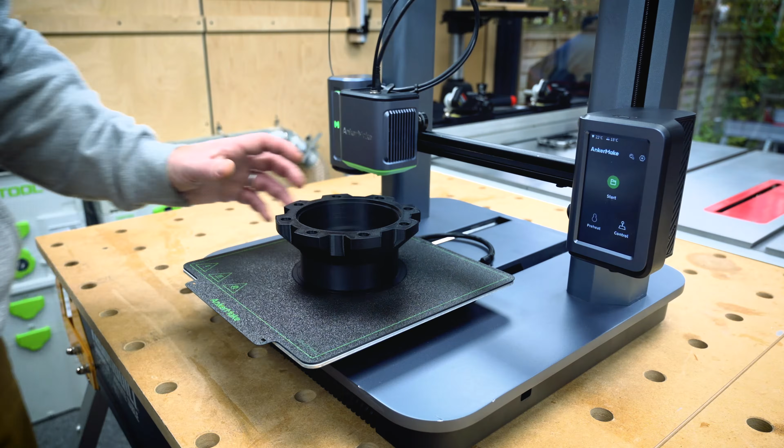I'm not a 3D printing expert. I'm a woodworker who's discovered that 3D printing for the workshop is super useful as well as being a lot of fun. I want to take you through the how, the what, and the why for bringing a 3D printer into the woodshop.

Before you click off, let me ask you, do any of these sound like you? Why would I try 3D printing? I work wood, not plastic. Isn't 3D printing just about creating toys and art that doesn't have any functional value? I don't have time to learn all the geeky aspects of another hobby. I've already got one of those.

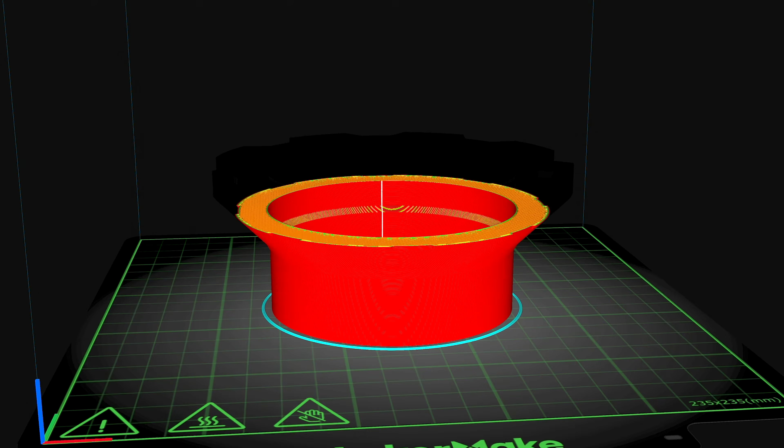If you'd asked me a year ago whether I wanted to try 3D printing, all of these would have been my answers. However, fast forward to now, and my views have totally changed. I have realized the value of having a 3D printer in the shop for making functional parts. I've also seen how modern printers take most of the tinkering away and pretty much let you get going straight away. So if you're curious about bringing a 3D printer into your shop but you aren't sure what you need to know or what sort of problems you can solve with printing, then this video is for you.

Now, a useful way to frame the topic of getting started in 3D printing is to ask, what do I need to make the parts? Let's sketch out the key pieces to get a sense of the full workflow. At the heart of the workflow, there is of course the printer. While there is huge choice here, for woodworkers, there are really only a few worth considering.

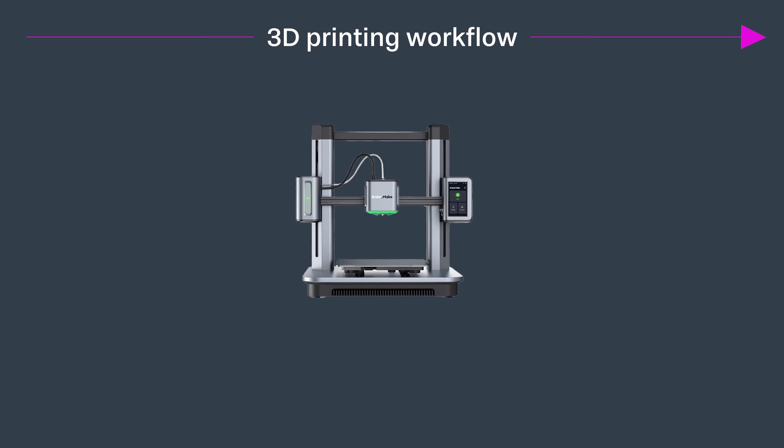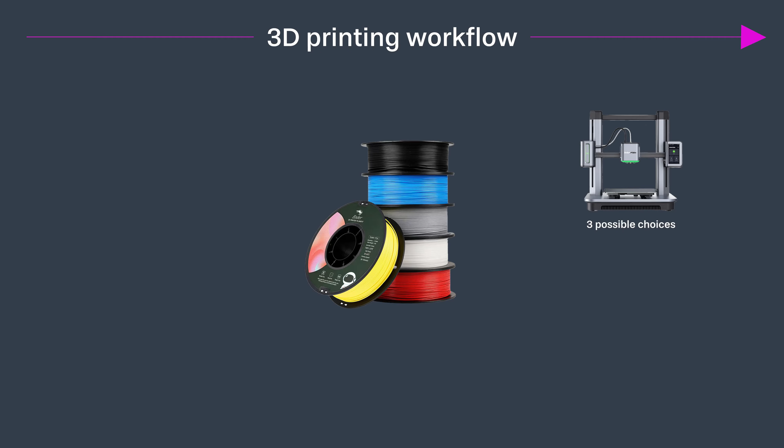Alongside your printer, the next most important part is the plastic consumable, or the filament that you use. Now, while there are loads of types of thermoplastic that you can use, and of course many brands, for the shop, we only really need to consider 3 to start with.

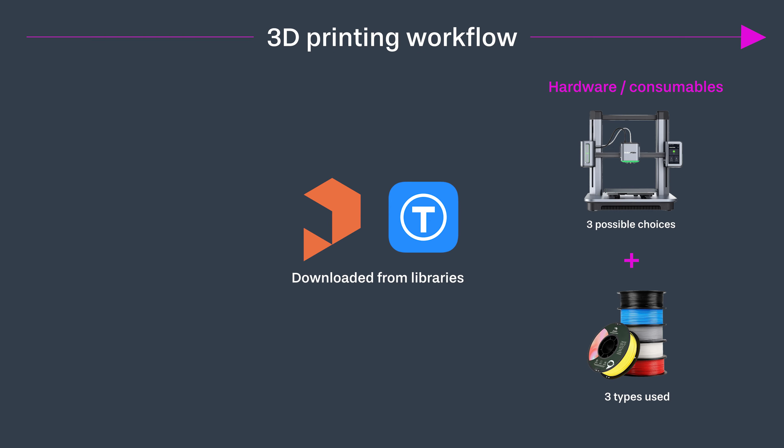With the hardware and consumables in place, the next piece is what you're going to print. These are called models and exist as digital files in a few different formats, where the models are either found and downloaded from a 3D model website, or you make yourself in CAD software.

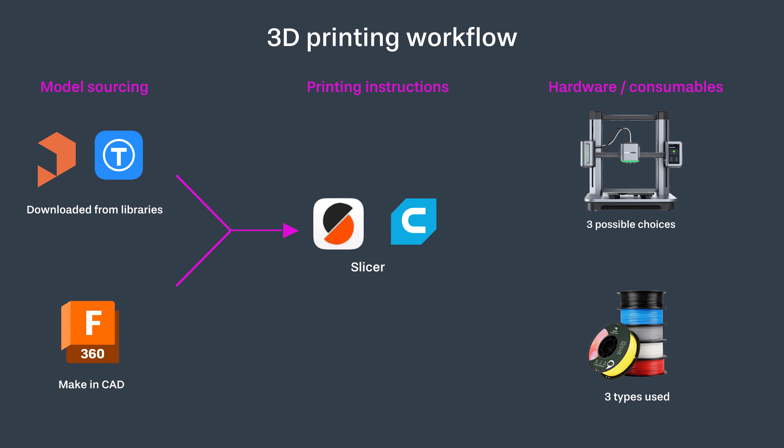On the software side, there is one other piece that we need to care about, and that is what is called the slicer. This is software where you tell the printer how to behave while printing your model. So now that we have the 50,000 foot view, let's spend a few more minutes at a slightly lower altitude for each piece. First up, printers.

When it comes to printer choice, I think it's a lot like the market for woodworking tools. In other words, a bunch of brands and some pretty vocal fanboys, much like with, say, Festool or Ryobi. Also, in a similar way to the woodworking choice between hand tools and power tools, 3D printers, for me at least, fall into two camps.

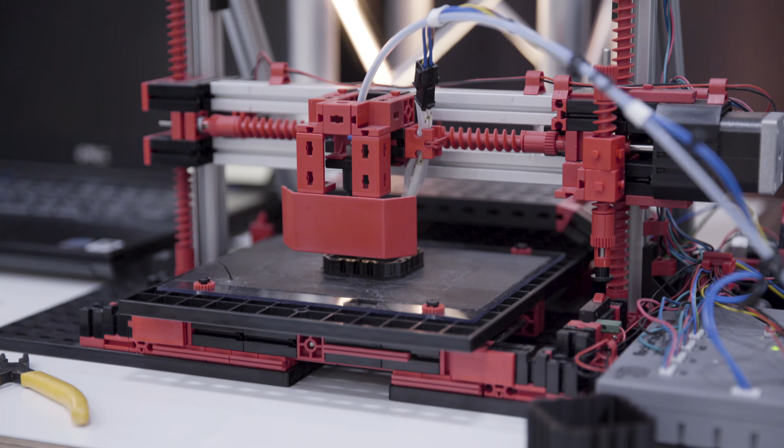There are printers where the build, setup and maintenance of the printer is half the challenge. And then there are the printers which you take out the box, turn on, and you're pretty much good to go. My recommendation for all woodworkers is to choose a printer that ticks 3 key boxes.

It needs to print fast, ideally in the region of 250 millimeters a second, has a Wi-Fi connection, and the print bed is self-leveling. While these features do have a cost, of course, I would argue that without these, the experience of use will be at a level of friction where you simply won't use the printer.

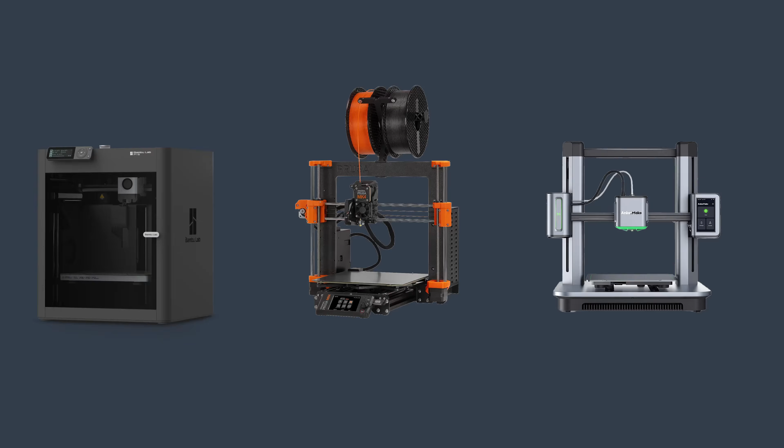So which one do you get? Well, as I said at the start, I'm not an expert, but what I do know is that these 3 printers will give you a good experience: the Bambu Labs P1S, the Prusa Mark IV, and the M5 from AnkerMake.

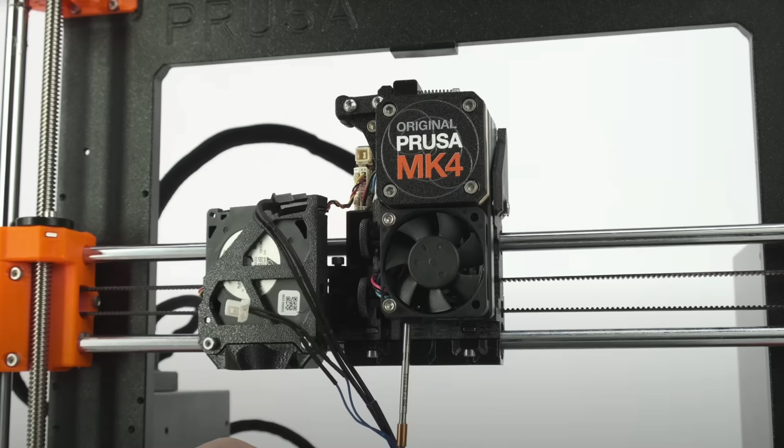Prusa and AnkerMake do have less expensive variants, but you will lose some of the quality of life features that I personally wouldn't be without. I have the AnkerMake M5, and while it is for sure less repairable than the Prusa, I've had 0 issues from day one and have found the print quality to be good even at high print speeds.

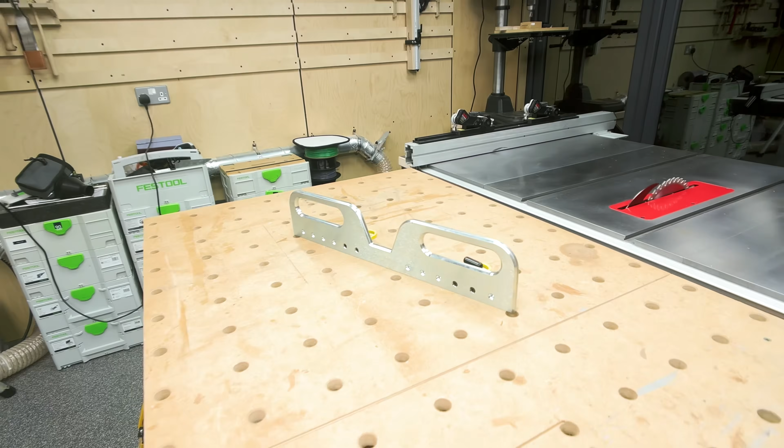It's also pretty robust, as I found out the other day when I accidentally dropped a 10-pound fence on it, where the all-metal casing prevented me from having a very bad day. I will leave links in the description, but watch some other review videos as well before deciding.

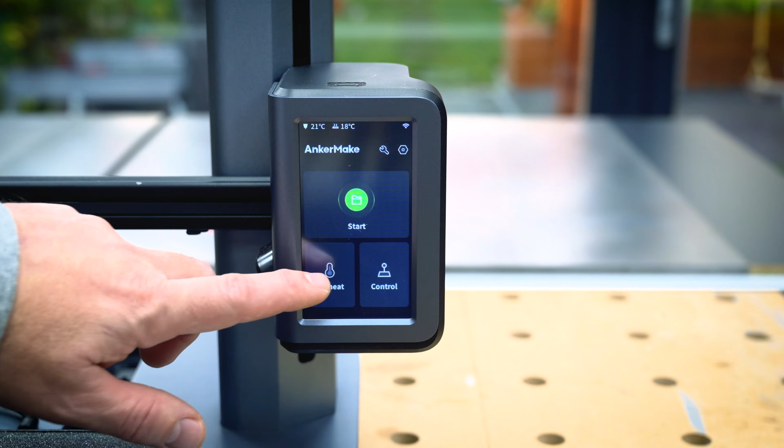On to filament, where to keep things simple, we only need to think about 3 types. First is PLA, which is your basic default material. It's easy to work with, pretty inexpensive, and has fairly good characteristics, although it is rigid and it doesn't like heat or sunlight. However, for use indoors where there isn't much stress being applied, it's a good option. Think lightweight tool holders like these for my push blocks.

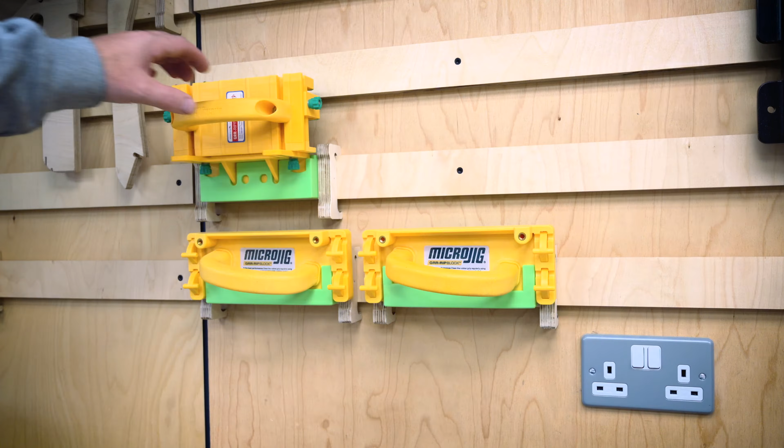Second is PETG. This is a little bit more hard wearing, but also has a bit of flex in it, so works well for prints that need to move a little, like for example these hose clips. However, you will need to pay more attention with printer settings to get good results. PETG in particular also needs to be kept dry or dried out before use.

Third is ABS. This is the most robust of the 3, and I use it for where there is more stress being applied to the part, like for example when I'm printing wall brackets for heavier tools. That said, ABS is also the most difficult of the 3 to print well. You'll need a print bed and a nozzle that is a lot hotter and a warmer environment to reduce the possibility of warping. Basically, you want your printer to be in an enclosure, which I'm planning to build for my printer very soon.

It's worth mentioning that some printers come with enclosures or offer 3D printable plans for one. However, as a woodworker, I'm planning to just make one. Watch this space for that video.

Getting models to print is probably the easiest part. There are a few web libraries where you can simply browse or search for what you need. Thingiverse, I think, was the original, but my favorite is Printables. It has a useful collections feature which appear in search results. So for example, I can type woodworking into the search and see collections that other users have made for their models. This alone will give you more ideas than you know what to do with.

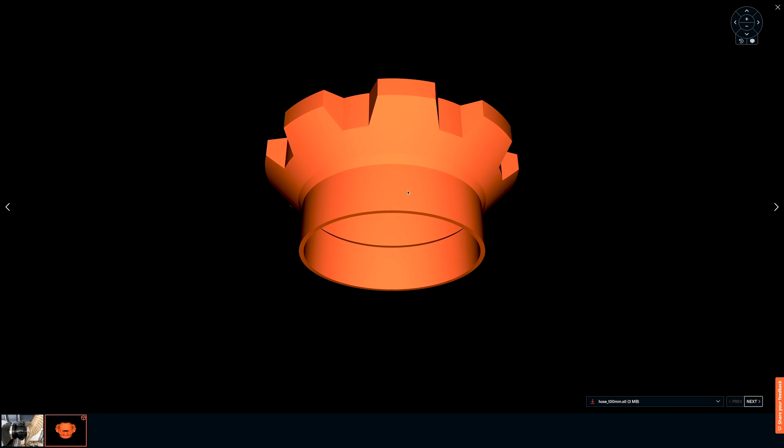For example, one model I found that I want to print is this magnetic dust hose coupler. And if I go to the Files tab, I'll see that there are STL files. You might also find 3MF files. These are pretty standard model files which you can download to bring into your slicer.

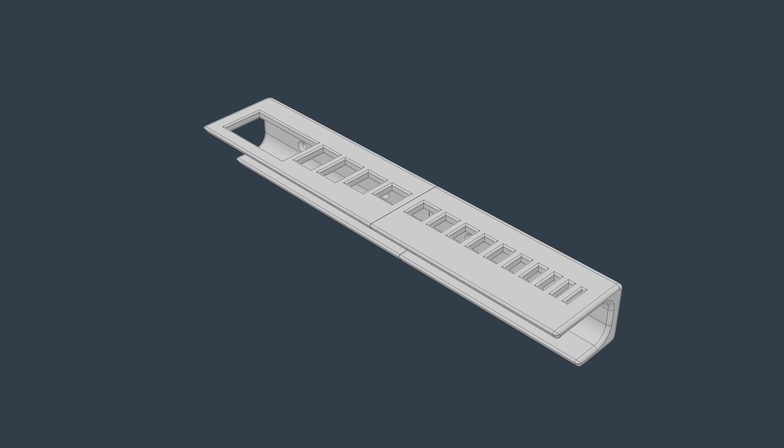Before we have a look at the slicer, I want to briefly mention creating your own models. I know that many of you are already using software like SketchUp or Fusion 360 for your woodworking builds. Well, Fusion has the added benefit of being able to create 3D printing models pretty easily. For example, I have these setup blocks that I want to put on my cleat wall. So I just need to use basic sketching tools in Fusion to create a simple pair of brackets. From here, I can simply export as STLs ready for the slicer.

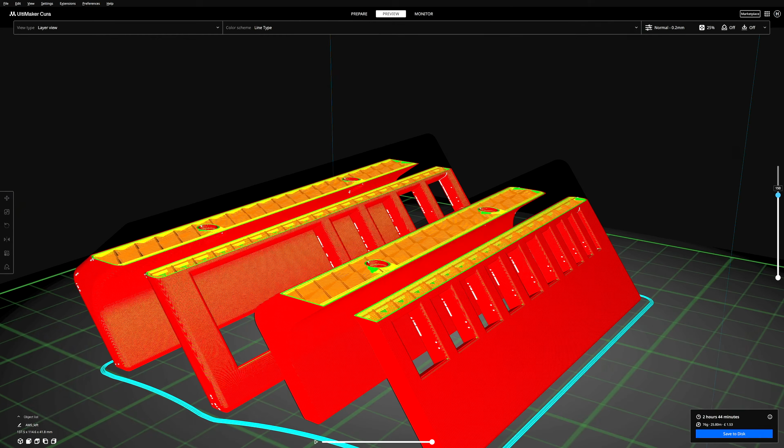Okay, we've mentioned slicer loads of times, but what is it? Well, this kind of 3D printing is achieved by your printer laying down these thin, horizontal layers. The slicer does the job of translating your solid model into these layers or slices. Now there are quite a few different slicer applications. Most of the makers of printers have their own. In my case, the one from Anker, I didn't really rate, so I had a look at two alternatives.

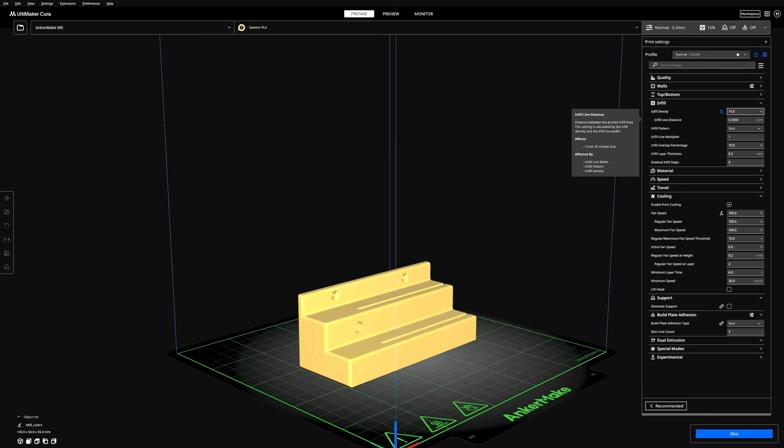One option is Prusa Slicer and the other is Ultimaker Cura. These are both free to download and you can take a look at both if you want. For me, Cura was easier to move around and understand, so maybe start there.

When you first load up either app, there is a setup process where you just need to pick which printer you have from the list. I found the stock printer profile for the AnkerMake M5 was a pretty good base to start with. You can then select which filament you're going to use. In this case, I have some eSun PLA+.

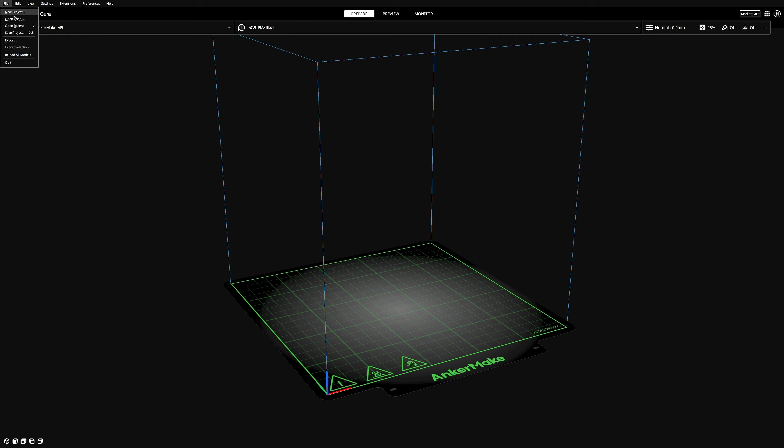Now we can load in a model, and I'm going to pick one of the sides of the magnetic dust hose coupler. With the model in a good position on the build plate, we can hit the slice button.

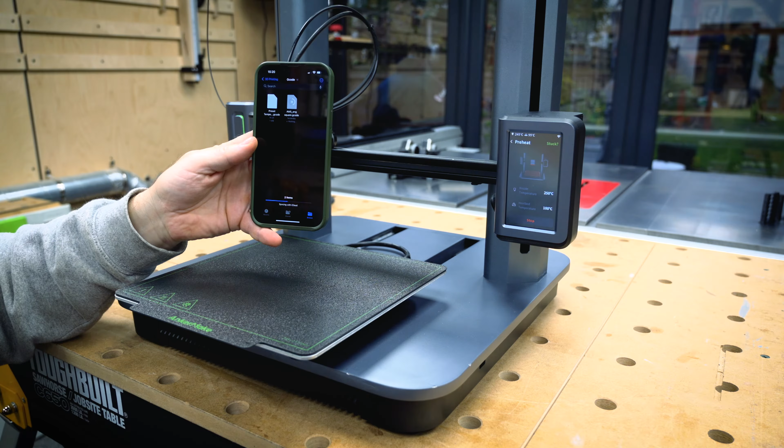This will generate a new file type called G-code, and we just need a place to save it. My workflow here with the M5 is to save the G-code to a cloud folder which I have access to on my smartphone. I then navigate to that file on my phone, download it, open the share menu, and send it to the M5 app, which I also have on my phone.

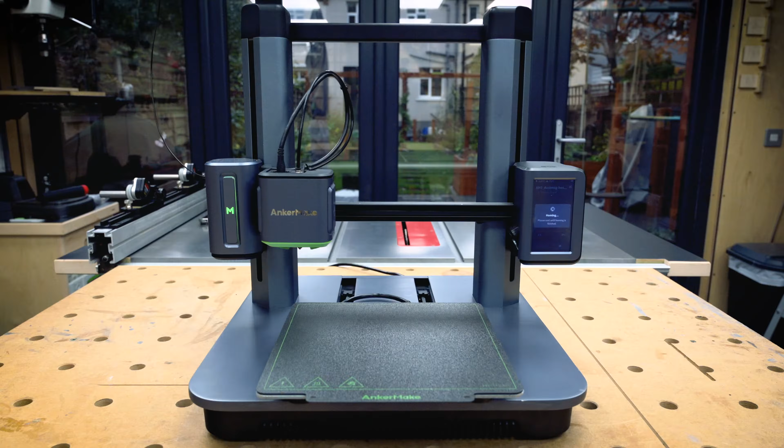This then sends the G-code over Wi-Fi to the printer, and the print will begin without me having to take any further action. The printer will first heat up, do a homing cycle, and then start printing. In this case, the part is pretty large and will take a while to complete.

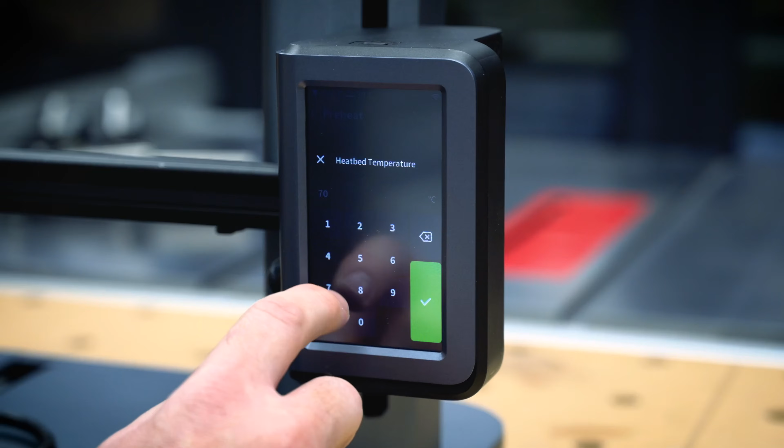Generally speaking, it is worth keeping an eye on the first layer or two just to make sure it sticks properly to the bed. If it doesn't, then you'll need to increase the print bed temperature. However, for PLA, you're unlikely to have a problem.

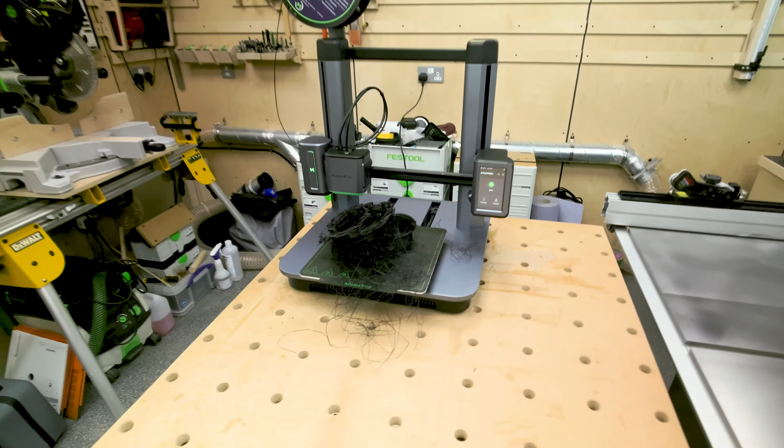Saying that though, you also need to be careful if there is limited contact area between the model and the bed, or this can happen. However, this isn't a problem, as back in the slicer we can adjust bed adhesion from a skirt to a brim. And now rerun the print and learn the lesson for the next time.

Printer calibration is a big topic, and much of it I've yet to get into, as most of the models I print are pretty simple. However, there is one small area of calibration I do want to show you, as it's helped me a lot with getting better results when printing PETG and ABS.

What I'm talking about are called tower tests. These are tests which are great when dialing in a new filament. Let's quickly run these tests with PETG as an example.

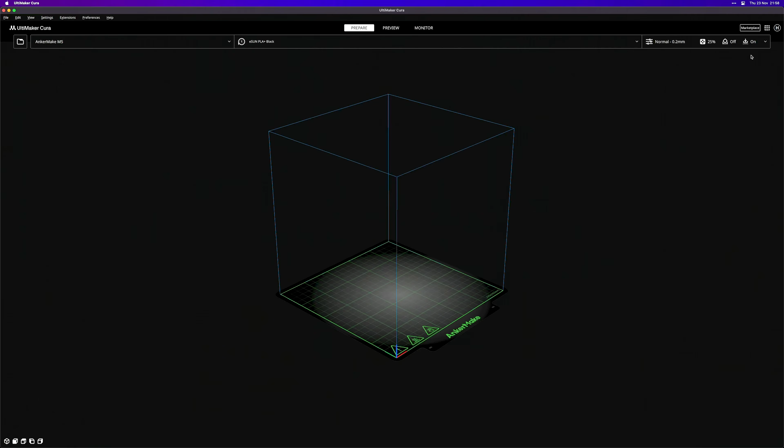Over in Cura, we just need to go to Marketplace and search for Tower. We will then see Auto Tower Generator in the results, and we can hit Install. With Cura, you need to restart the app now to see the plugin. You would think that modern software doesn't still have these kinds of issues, but I guess Cura devs took a holiday on that day. So with Cura back up, we select our material, in this case, eSun Black PETG.

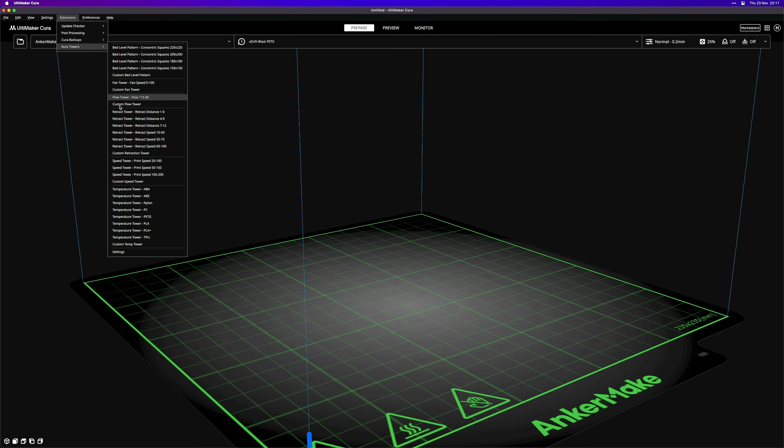And then we head over to Extensions, then Auto Towers. Here we are first looking at Temperature Towers, and choose the preset for PETG. Now we can see an odd looking model on the build plate. If we take a closer look, we can see temperature levels in Celsius. This is telling us that the temperature will start at 250 and then gradually reduce to 220. So let's slice this and get it printing.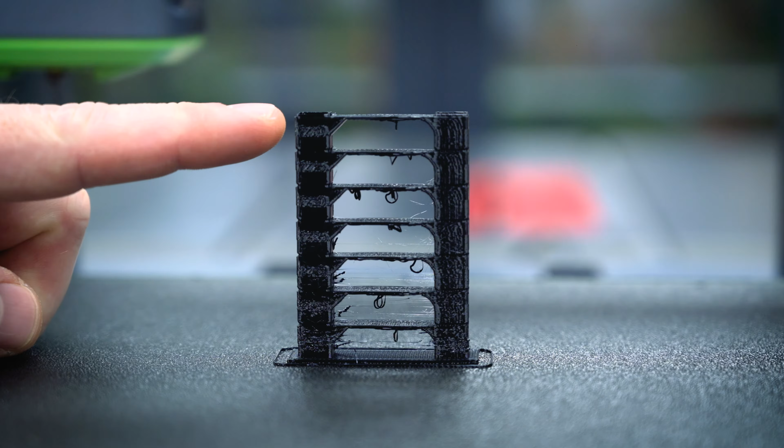With the test done, it's pretty clear that the top level is best, which is 220. However, it still isn't perfect. Back in Cura, we head to Manage Materials, and we can see that the default temperature for eSUN PETG is much too hot at 245. So I'm going to create a custom version of this filament by duplicating it and setting the print temperature to 220. I might even go down to 215.

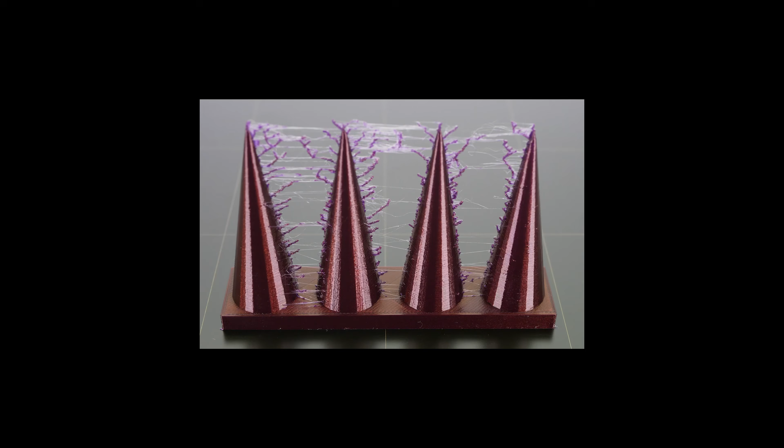With this modified temp in place, we want to do 2 more tests looking at retraction. Retraction basically handles how the filament is managed in the hot end. Badly configured retraction is one of the main causes of messy, stringy print results.

If we go back to the standard eSUN PETG profile, we can see that the default retraction distance is 3mm and retraction speed is 60mm.

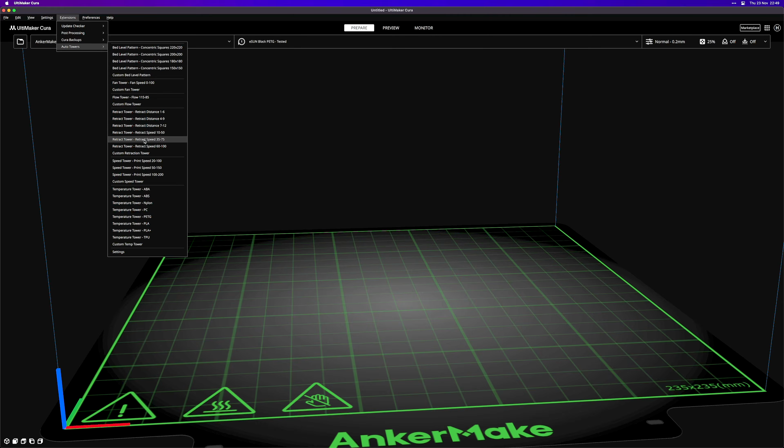With these numbers in mind, we clear the build plate, go back to our towers, and using the same process, we first do a retraction distance test from 1 to 6, then a retraction speed test from 35 to 75. As with the temperature test, we take the results from the distance test, update the settings, and then do the speed test with the new settings. On my printer, with this filament, I ended up adjusting the distance to 2mm, but kept the speed at 60mm.

Generally speaking, what I suggest you try first is a test print without doing anything other than picking your filament type and see how it looks. For this, you can use a standard test model like a Benchy, but personally, I just printed something I needed and only did tweaks if something went wrong.

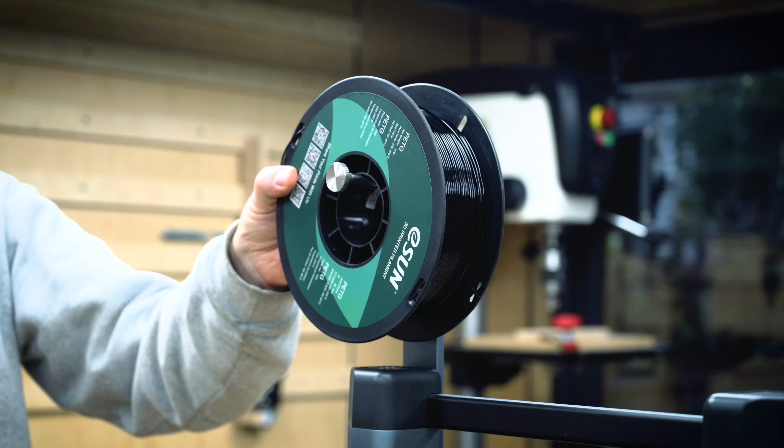So I think we've dealt with the what and the how. Now let's cover the why. Just to be clear here though, you don't need to get into 3D printing. However, if you follow my channel, you'll know that I'm a big fan of improving workflow in my small shop and using hacks to solve small problems. Well, for this kind of work, 3D printing is ideal.

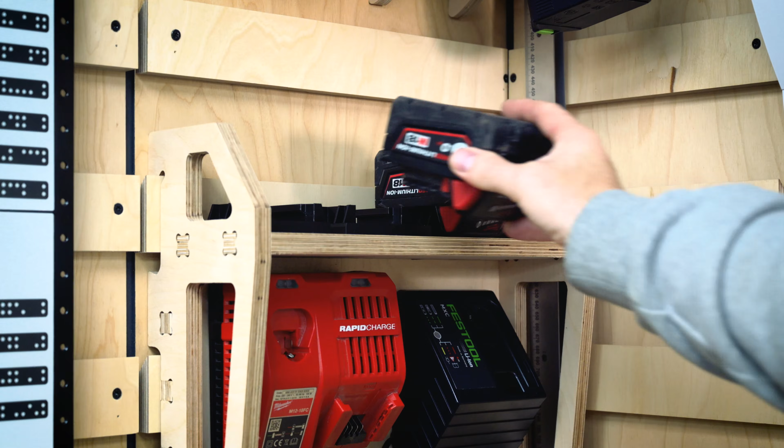Let's take a look at a few of the parts I've printed and a couple of my own designs to give you some flavor. The first area that I got into is tool holders for my cleat wall. These can be super basic like battery clamps or wall mounts for my micro jig push blocks. I even printed wall mounts for my Centrotec chucks.

Wall mounts can also be a little bit more involved, like these custom mounts that I made for my large engineering square and setup blocks that I mentioned earlier. If you're into cleats and wall mounting your tools, then the combo of wood and 3D printing is super flexible. Also, if you're thinking about cleats but aren't sure where to start, check out this video that I have linked above and down in the description.

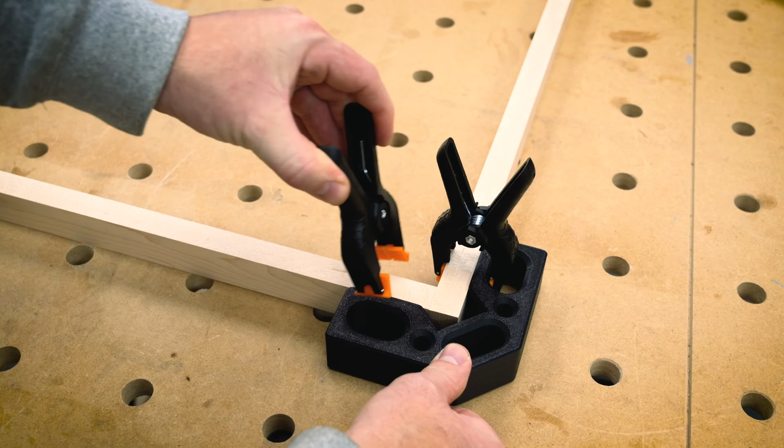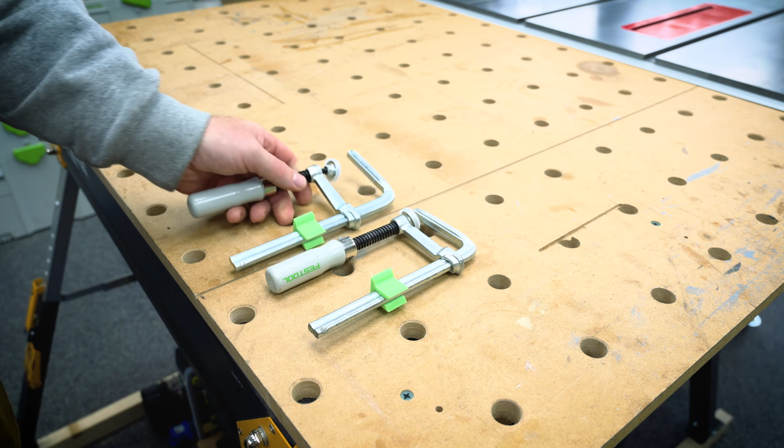Another interesting area where prints can be a cheap solution is work holding. For example, here we have a couple of corner clamps which can be used for getting boxes square and are a lot cheaper than alternatives from the likes of Woodpeckers. You can also print parts to make match fit clamps more flexible or simply limit the movement of your quick release clamps. Oh, and you know how removing dogs from your table can be a pain, especially in MFT style tops like this one? Well, there's a print for that too.

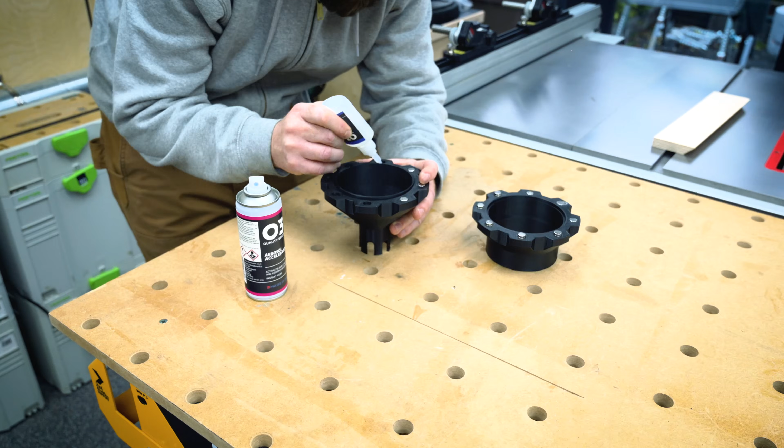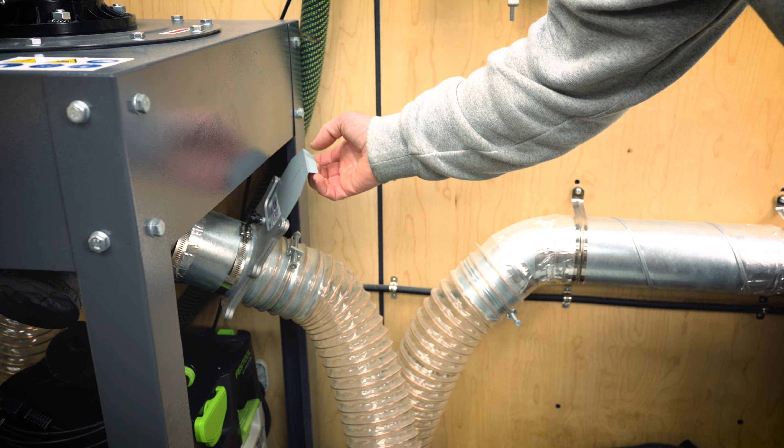As we saw earlier, prints can also help with dust extraction. Now when I set up my spindle sander, I can just use this magnet coupler and off we go. I've also found this super interesting model for a ball valve blast gate, which apparently has a lot better performance than these annoying aluminium ones. I'm going to try one of these out soon, and if it works, I'm probably going to replace all of my blast gates.

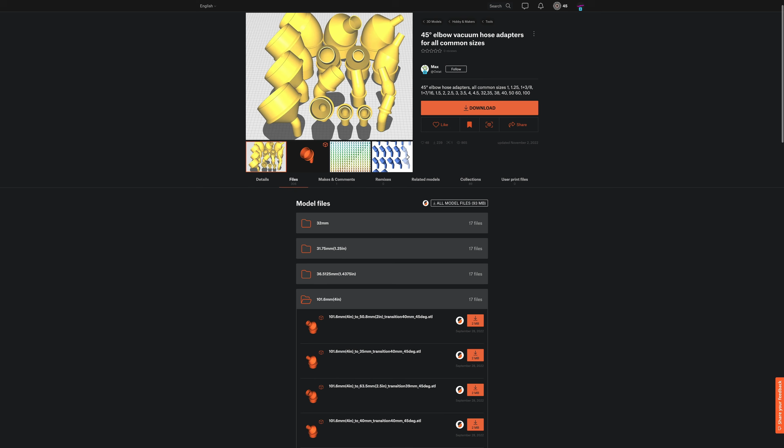If you have a ducting setup for your dust extraction, then printing your own splitters and branches would be a simple way to save money versus using metal. Shame I wasn't into printing 6 months ago.

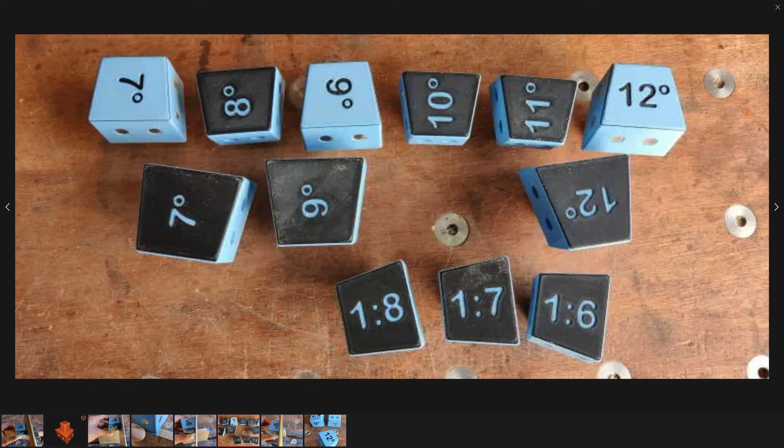One more area that has a load of potential is jig making. Again, this can be super simple, like this right side cut jig for your track saw, or a little bit more involved, like this magnetized dovetail jig. Not to mention all of the templates that you could easily make up for your router. Want a simple bow tie jig? No problem. Don't like the one in printables?

Make your own in Fusion. If you've got this far, then hopefully you now feel more clued up on what printing can bring to your shop. And if you decide to go for it, you've now got the basics to get started.